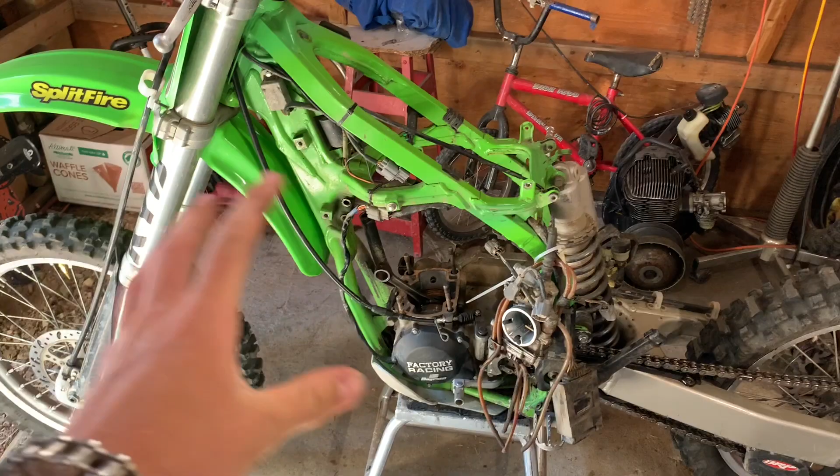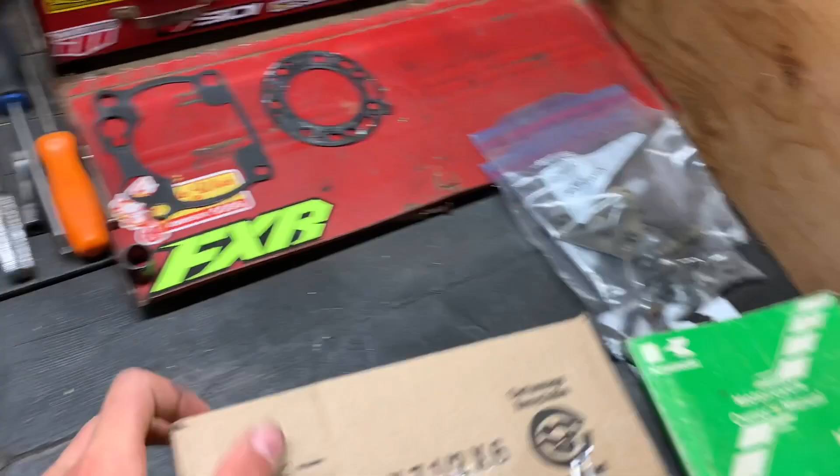Okay, so I rinsed out my crank. Bearings are dead smooth. They're dialed. And I just got my top end and gasket set in the mail. Okay, there's the gasket set. Nice.

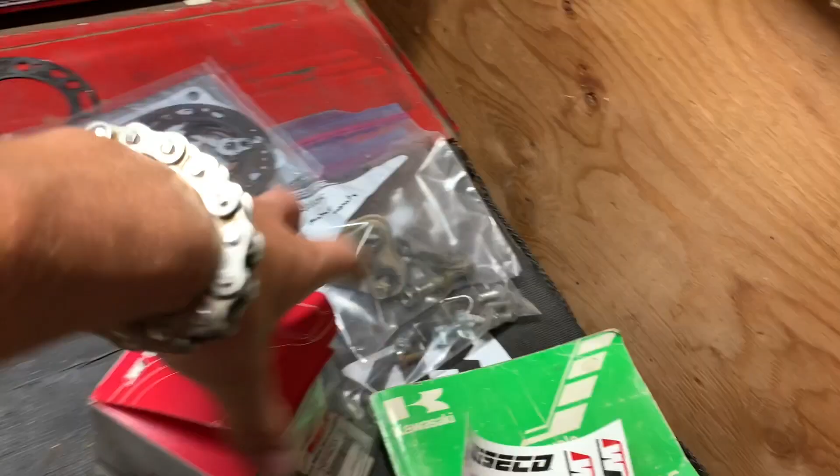Piston really just come, dude. What is this baloney? Get some Wiseco stickers. Piston rings. Did it really not? Oh, maybe it's in the box. I've unpackaged enough of these to know about. What? Doesn't even come with a new wrist pin. Good thing this one isn't shot.

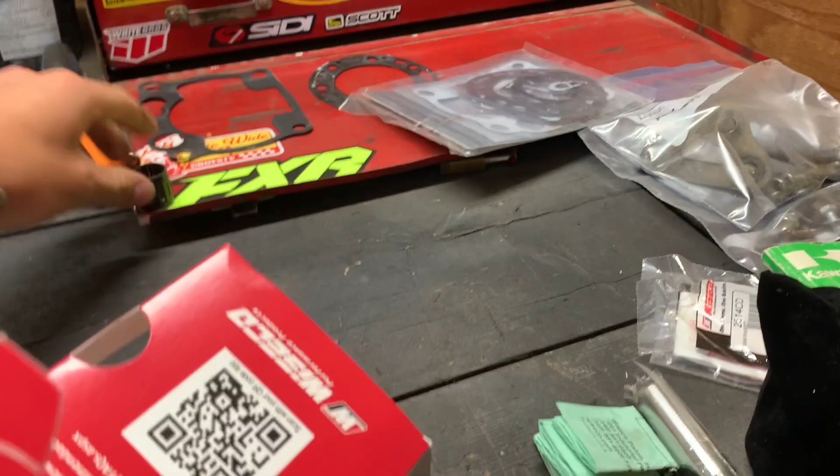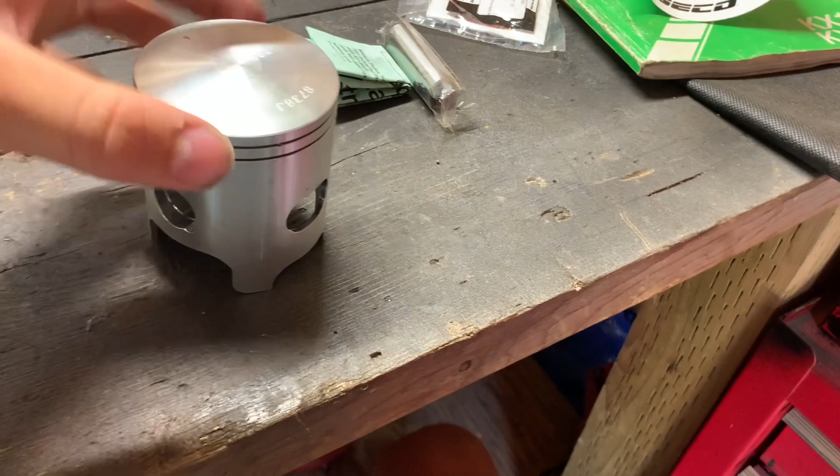Why are these things open? And there's only one in there. What is going on here? Oh, there is two. What? Brand new, fresh Wiseco forged piston. Yeah, it looks good. It looks good. Which the rings are open as well. Man, these guys were slacking. Should send this thing back, dude. Guys are slacking. These rings are like pressed together.

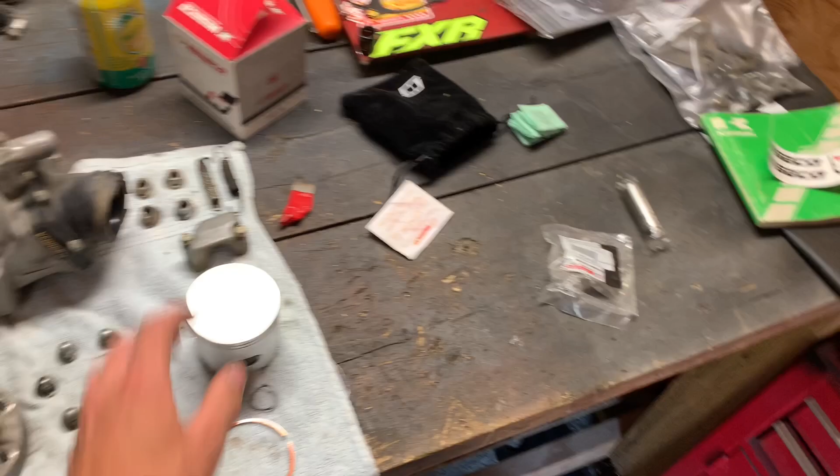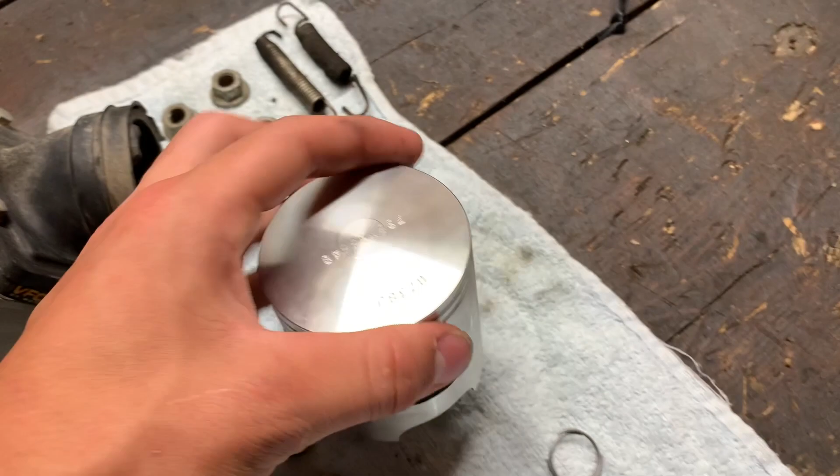So I'll clean the cylinder out because it's still got some chunks in there. I never touched it, I just set it there. So clean this out and then get her back together. And what's nice about this is I don't have an exhaust bridge, so I don't gotta drill any lubrication holes in this piston, which is sick. Yeah, that makes it so much easier.

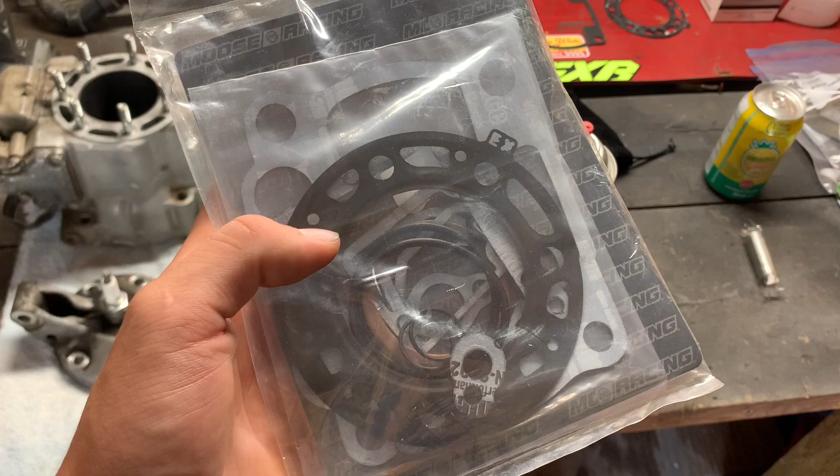So I'm gonna go get some brake clean. Actually, I think I have some in here, don't I? Yes, sir. Clean it out till it's buttery clean. Take all these off and replace the gaskets because I have the kit. So I'm just gonna throw all new gaskets in there. This comes with like a full kit. I didn't realize it. I only needed the cylinder and head gasket, but it came with pipe O-rings, exhaust, copper washer for the exhaust.

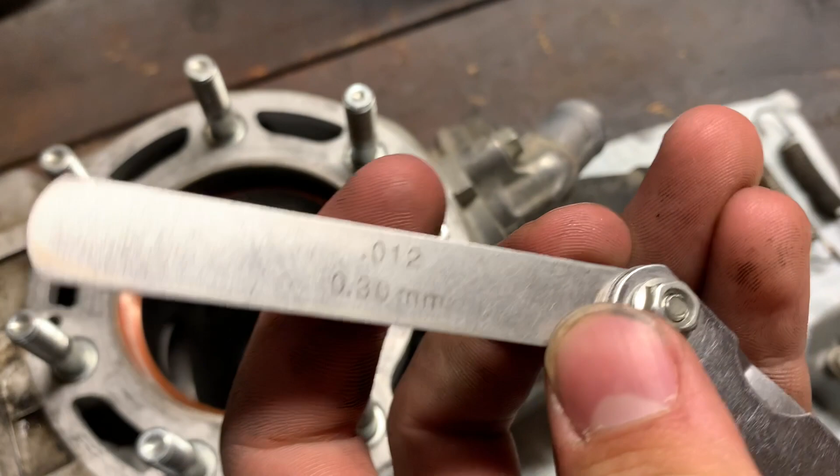Okay, so that's the ring end clearance, and it is 0.012. So we're in spec. I blew everything out and cleaned this out really good. So all the ports and everything are dialed. No shavings or anything. This is actually gonna suck to put in with a busted up arm. We'll get a rag in there so that we don't drop nothing into the bottom end because I've done that before. KDX.

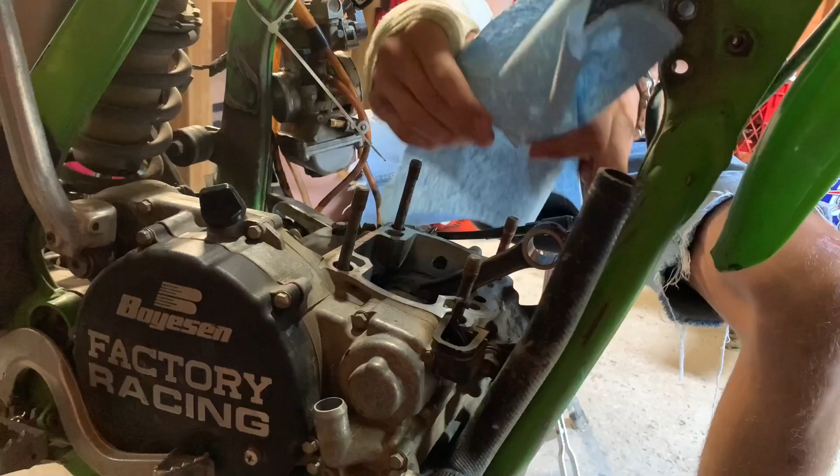So yeah, let's whip this thing in there. Pow the cylinder on. Okay, let's just get it. It's not the safest way to do this. There are a lot better ways out there, but I'm gonna get one of these circlips in there already so that I can just plop the piston on, slip the pin in, and then only have to install one, which should be easier than putting them both in on the bike.

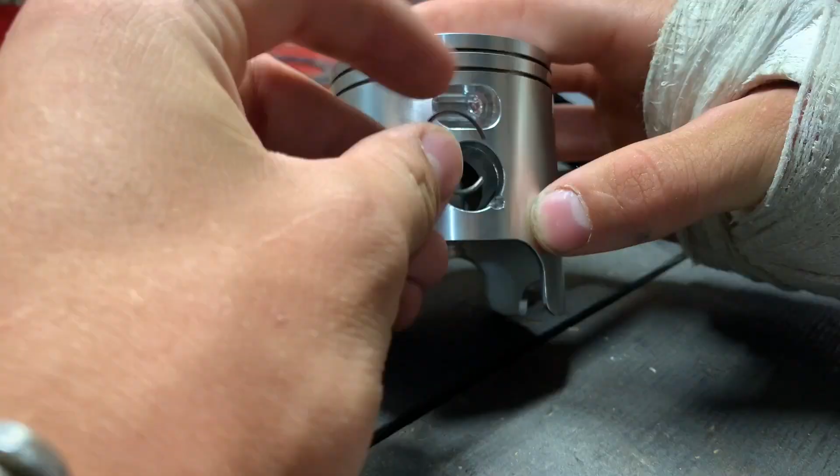You don't want to put them in sideways like that because, especially on the small bores like the 85s and the 60s and stuff, the pistons are going up and down so fast that the circlips will squish down from it going up and down so fast, and they'll pop out, and then they'll get wedged up against and just destroy everything. So you want to ideally put them on an angle like that. So that's what I'm going to try and do with minimal scratches.

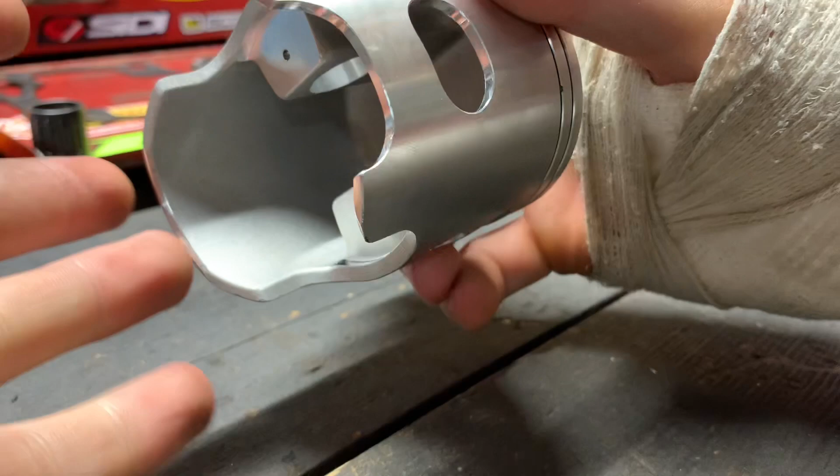Some are okay, and we're definitely going to get some, but kind of half in. I'm just going to press it in a little bit more before it pops out and explodes. There we go. Then we get that circlip in there, kind of on an angle. It's kind of up like that, so it shouldn't come out. The big bores, like I said, they're not stroking as fast because they got all this surface area to burn.

So now we gotta lube everything up, like my wrist pin. 2-cycle oil. I don't know if you guys can see that. I'm gonna get some on my finger. Now that thing's all oiled up, slip it in there.

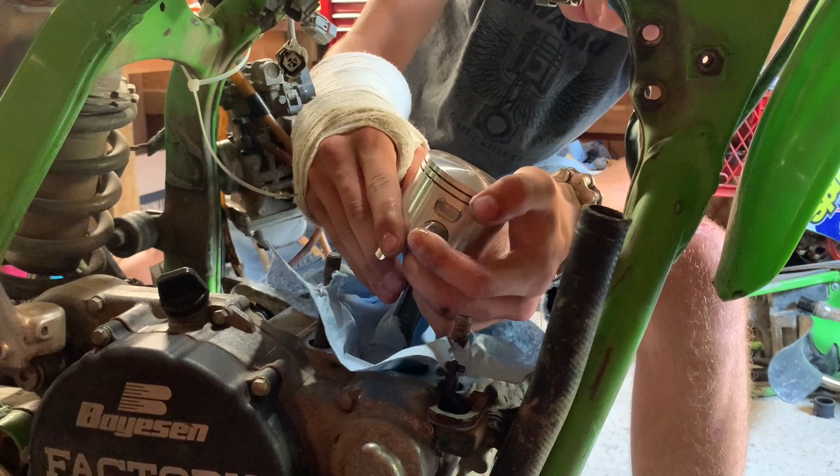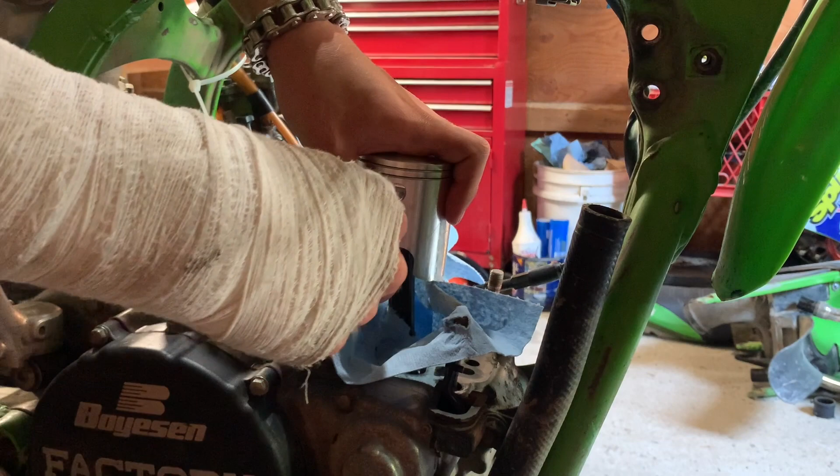Make sure she's in. I should have put the rings on before, but I'm gonna lube up the rings now and put them in. There we go. There, you gotta hear that snap. Make sure she's in. Tear that rag out of there.

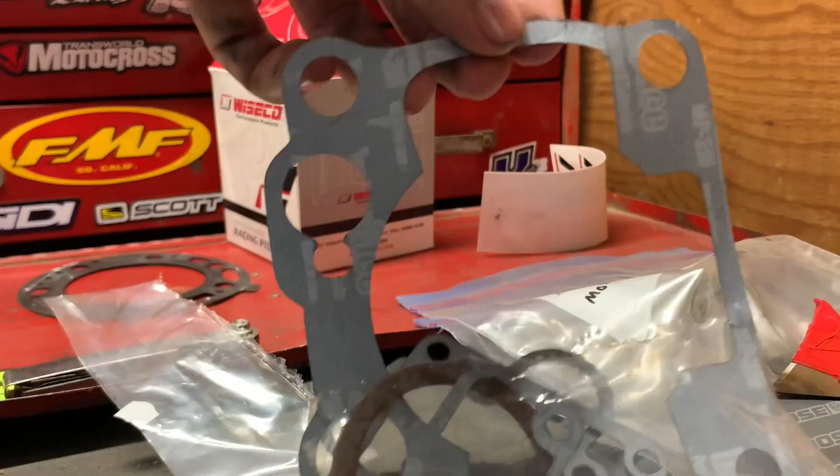So now I'm going to lube up the whole surface of the piston. Gotta drop this thing down to bottom dead center, because then it kind of holds the piston a little better. Ooh, wait, my base gasket. Holy. There's a lot of gaskets coming with it. Nice, okay. There we are. Base gasket. There we go. All right.

Piston's installed. Oh, it's not pushed down all the way. Okay, well, I'll get the power valve housing all hooked up, because that's probably what's stopping it. And then get those bolts threaded on, then crank it over a couple times. All right. Power valve housing's on, it's all seated.

Everything feels smooth. The oil's all good. It's gonna be good. Let's thread all those bolts on, get that power valve housing back together, then throw the head on, then rads, or then carb, then rads, and we'll go from there.

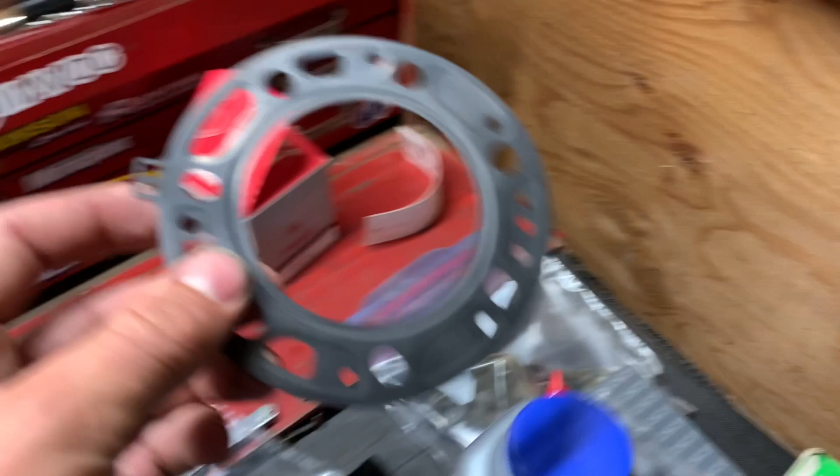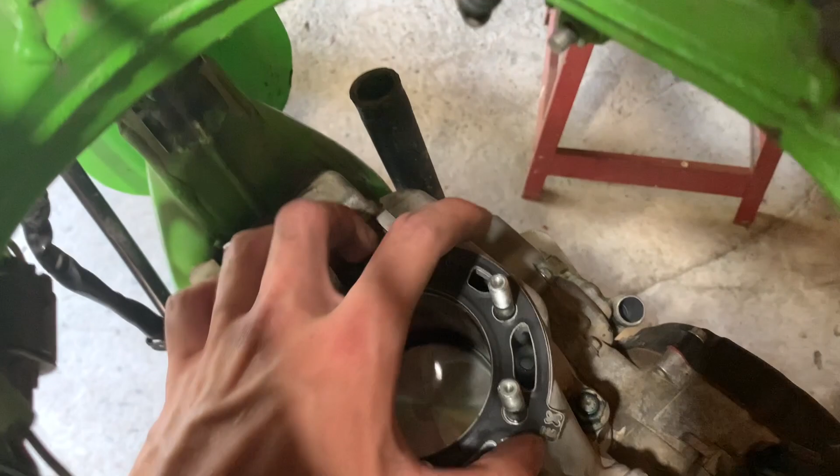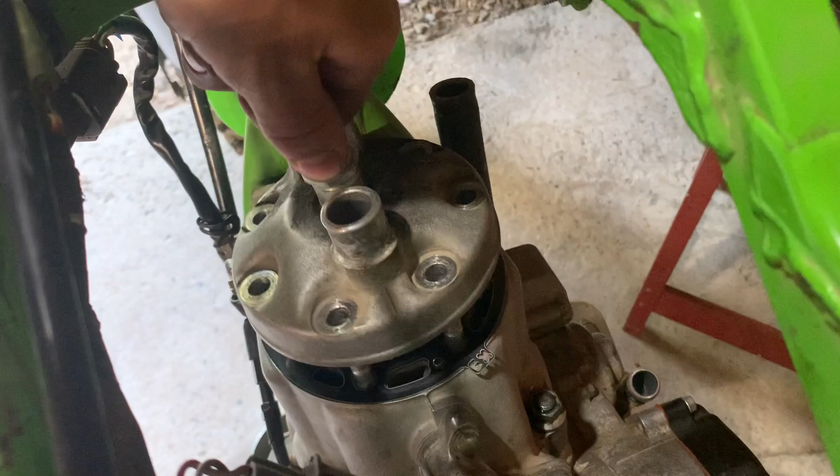Brand spanking new head gasket on that bad girl. I'm gonna pop her in here. Head gaskets can be kind of annoying because they get caught on the threads. There we go. Head gasket's in. It's all cleaned up, ready to be put on. There she is. Okay. Let's get all these bolts put on there, tightened on there, then get the carb on. We'll go from there. All right, I got my carb on.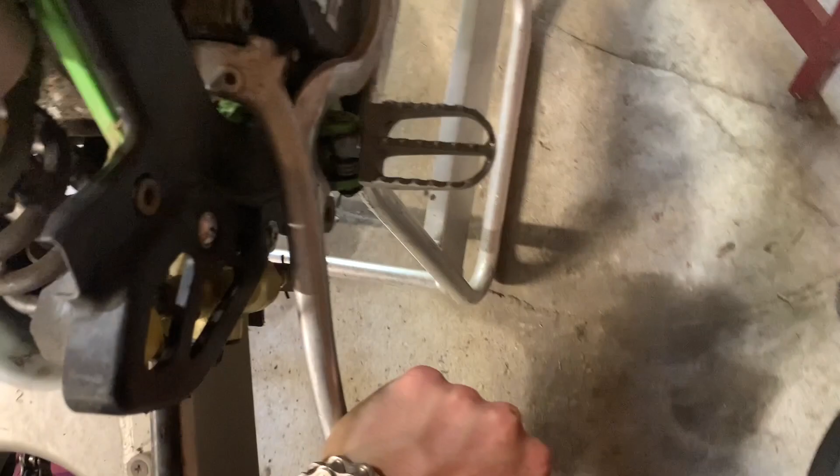Got the head bolts all tightened down. It has crazy good compression, as usual. I'm gonna run a test on it. Just quickly, I'm gonna put the rads on because they're the biggest pains in the butt. Feels way better than it did. This bike, oh boy, holy smokes. This bike has more compression than a CR500.

And you may be thinking, well, that's not true. It's got a shaved head. So the head is shaved, so it's got more compression. I guarantee you this thing will have more compression. I'll put the CR500 compression up on the screen, and then I'll put mine up on the screen to show you guys the truth behind everybody saying you need a boot to kick over a CR500.

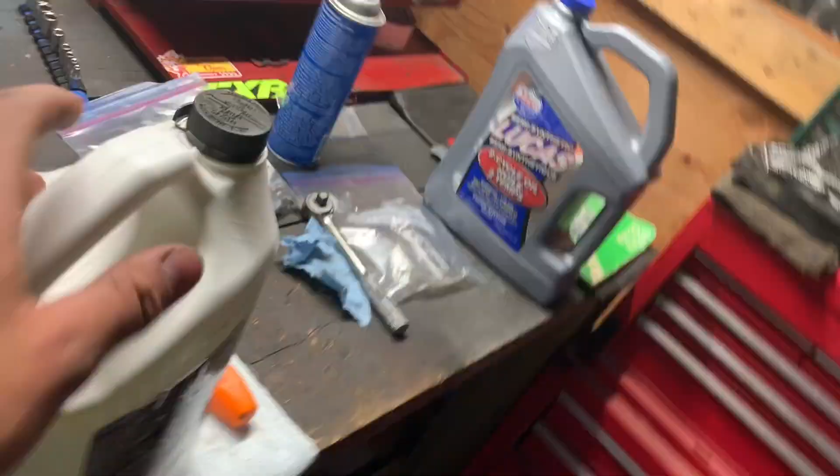Time to fill this thing with coolant. I got the rads on. Let's get this cap off. That thing's usually a little difficult to get off.

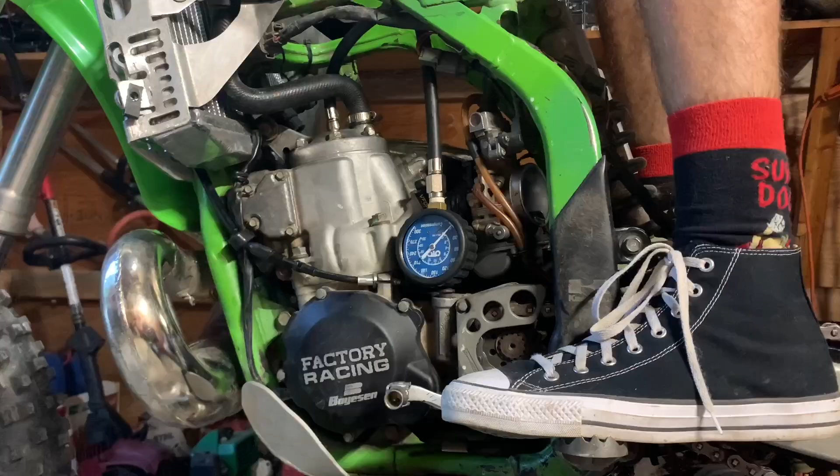Alright, I'm gonna run a compression test on this bad baby right now. There she is. We're live. I'll set this thing up so that you guys can see it somewhere on there. Throttle's open. Oh. It's loud. Still going up, yeah. We'll say around 205, 210.

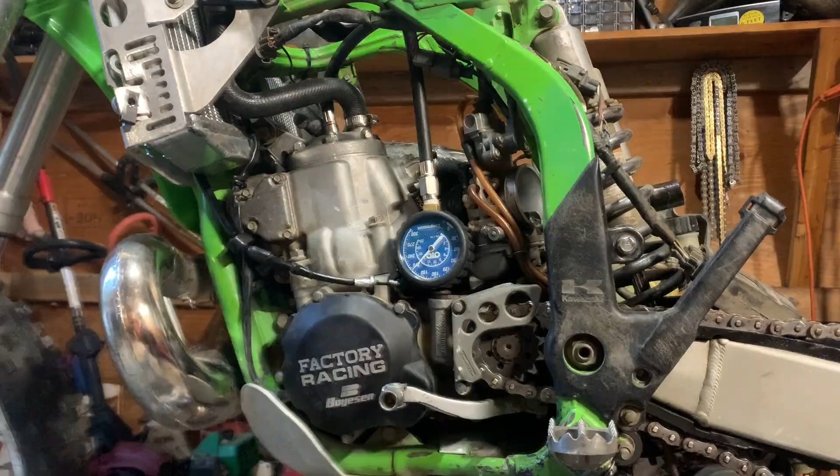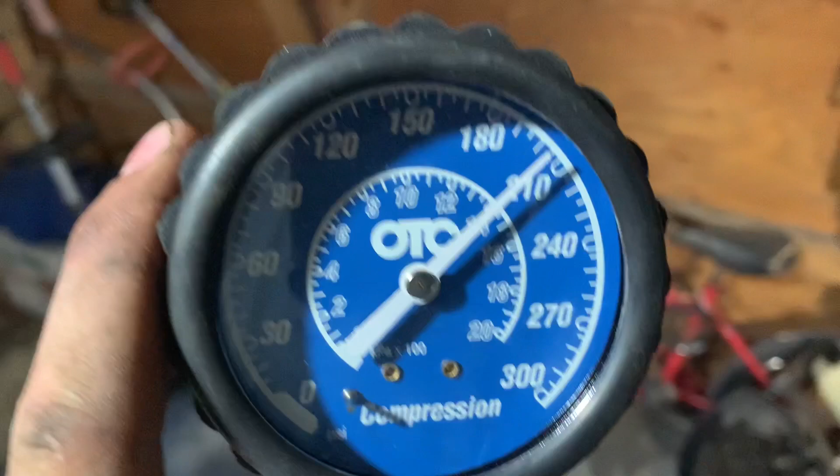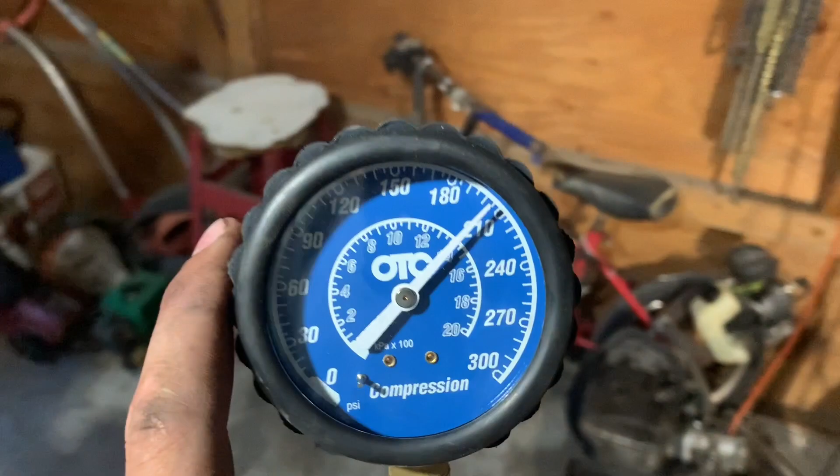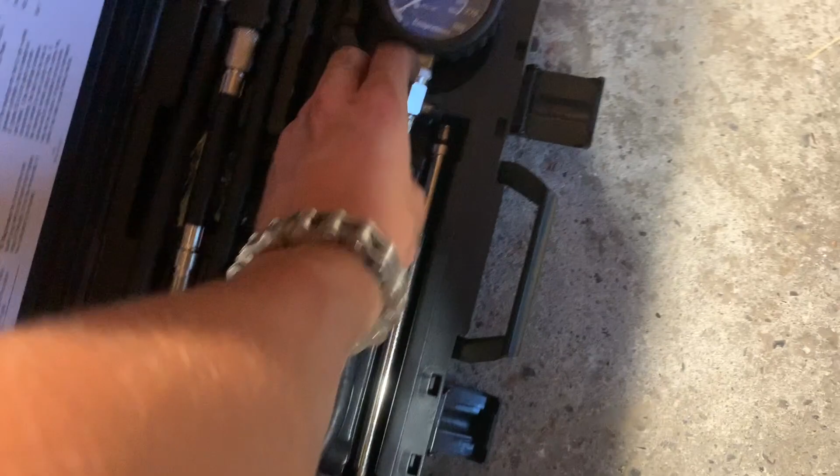Not to brag or nothing that this thing's higher psi than a CR500, but you know, it's just a common misconception, people thinking that a bigger bike needs more to kick, you know what I mean? Like, everyone always thinks that CR500s just have crazy compression, but it's only because they have more air going to the top end, so it's more difficult to kick them over.

But I think my budget fix, where I just blew out my bearings and everything, I think that worked. Ooh, that was a process. Glug it in there. Don't spill.

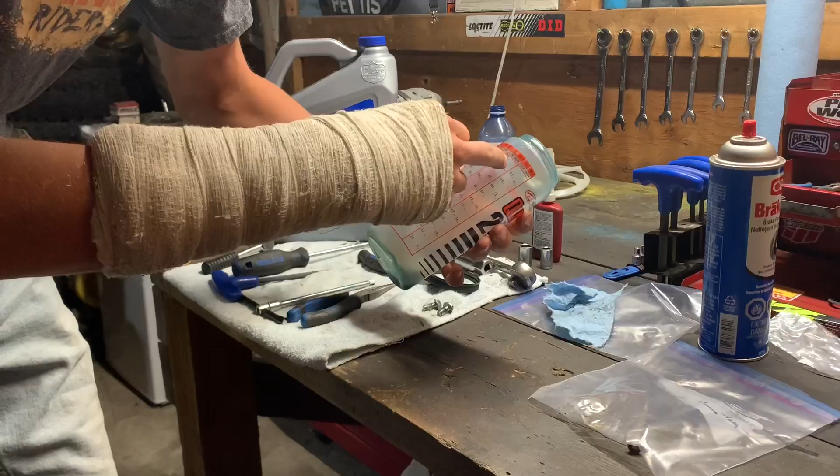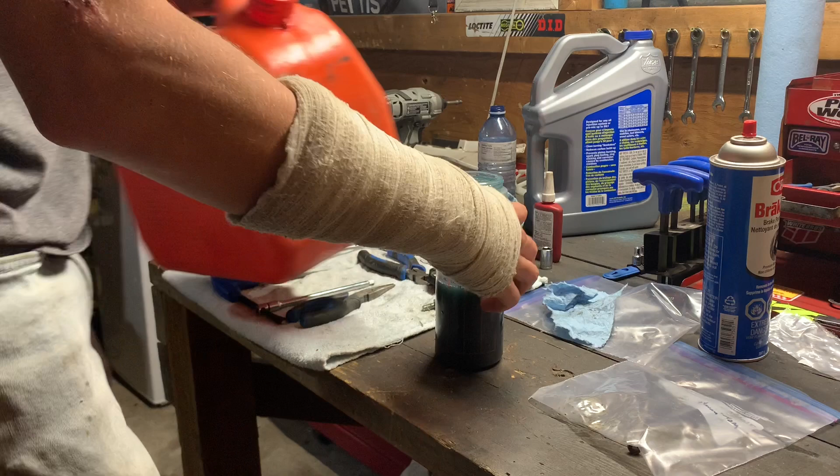Ooh. We're gonna mix 32 to 1 at 10 liters. I don't even have a 10 liter, it's only 11. Here we go. Throw it in the jerry can. This is a forgotten art. 2 strokes. There we go.

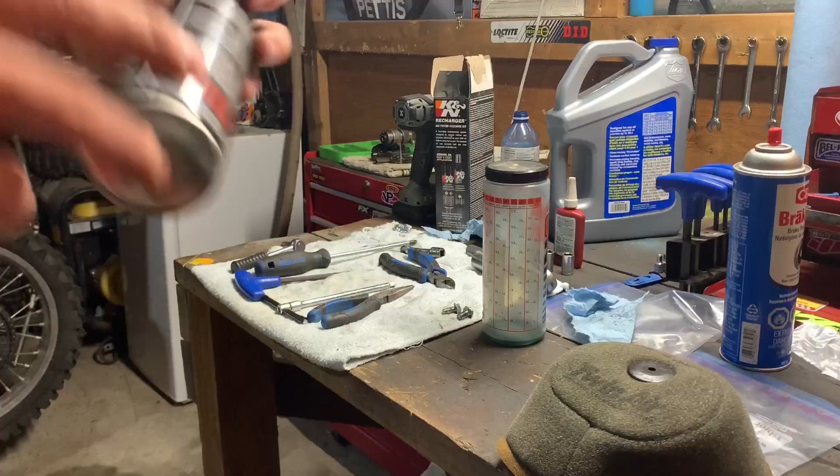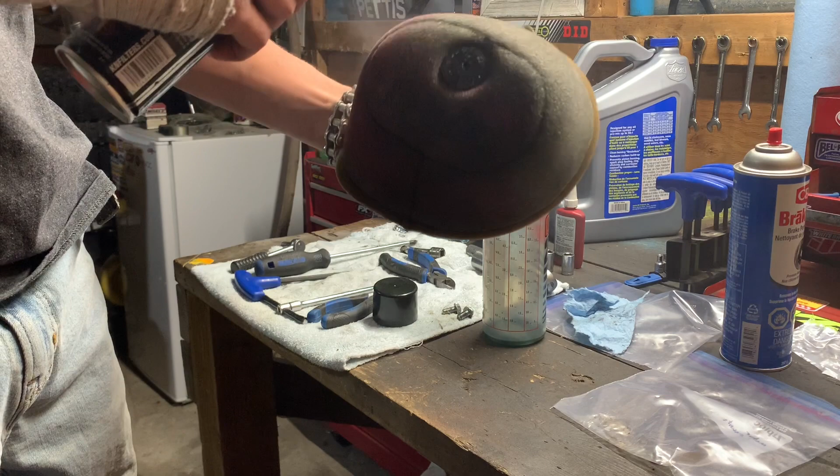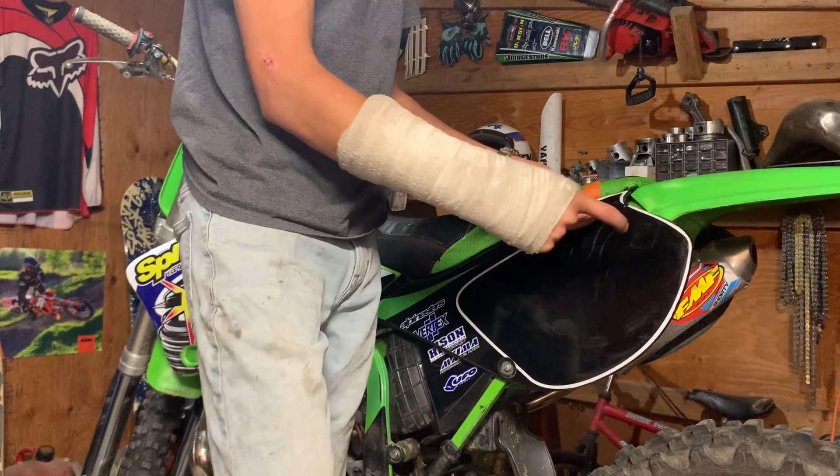All I've got right now is this K&N oil filter stuff. So I'm just gonna spray it on there. This stuff doesn't get sticky till later. Okay, now I'm gonna throw it in the bike. Final piece. I'm gonna make sure my gripper strap is in there. Oh, okay. Fresh rebuild. Here we go.

It runs! Holy smokes. I am so stoked. The Wiseco is sounding good in there. I hope you guys enjoyed the video. This is my first out of a couple heat cycles I'm gonna do.